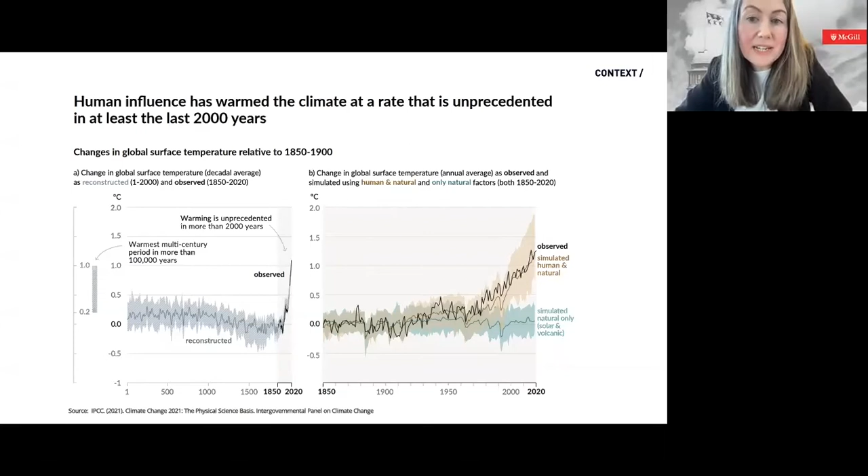The report outlines the pathways limiting global warming to 1.5 Celsius require rapid and far-reaching transitions in, among other factors, energy and urban infrastructure, which includes buildings. So this forecast makes considering the reduction of greenhouse gas emissions in the design of our built environment ever more pressing. And why are buildings an issue?

Well, on a global scale, buildings use 40% of resources, 25% of water, 40% of energy, and they contribute to approximately one third of global greenhouse gas emissions.

So this is where considering a circular economy in the built environment can be very promising, unlike a linear economy, which is more typical in the construction industry today, and results in high consumption of energy, water, raw materials, and also high pollution in terms of emissions, wastewater, and construction and demolition waste.

A circular economy strives to improve resource efficiency mainly by closing the resource loop and by stopping the wasteful use of resources. And as climate pressures increase and material scarcity is imminent, systems thinking and innovation in material recovery will be critical to really helping ensure that built environments can embrace this kind of circular approach.

This is something that we explored through a report on circular economy in the built environment. This report was part of a series of regional reports prepared by the United Nations One Planet Network Sustainable Buildings and Construction Program. It looked at the state of play for circular built environment from regions around the world, with other reports looking at Africa, Asia, Europe, Latin America and the Caribbean, as well as Oceania.

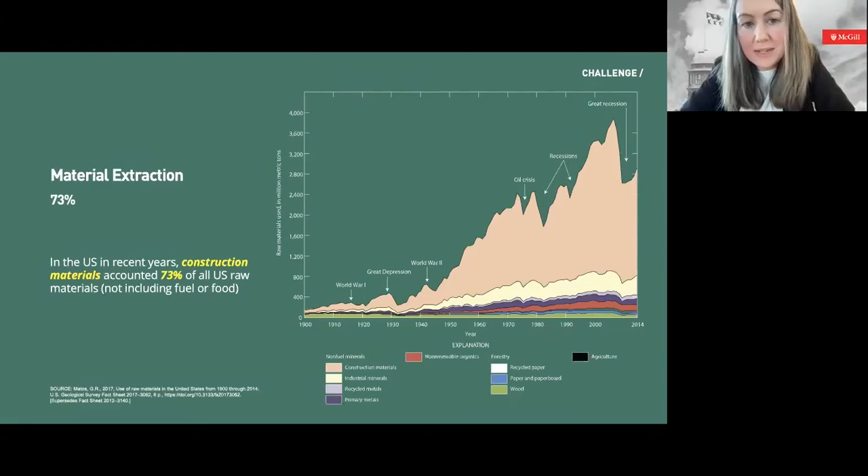And if we think about the end of life of materials, when it comes to municipal waste, in 2017 figures in the US, 52% of municipal waste went to landfill, and 25 to 45% of all construction solid waste stream was construction and demolition waste.

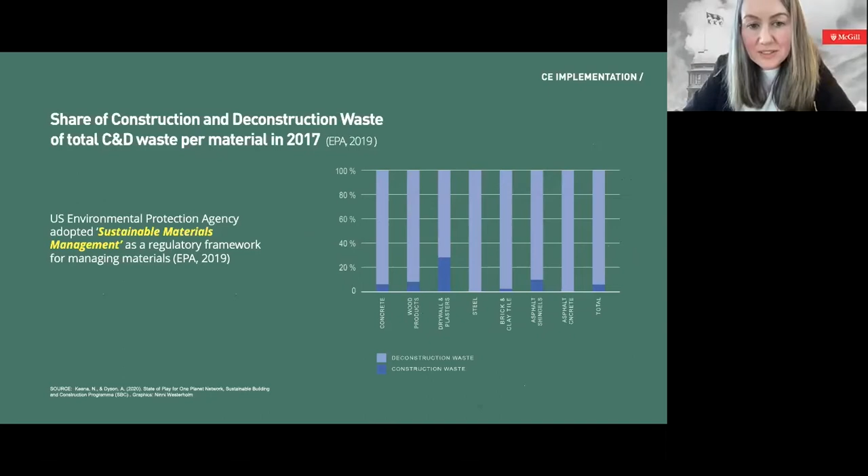Construction and demolition waste is at the deconstruction and demolition phase, but we also see it at the actual construction phase. Another key challenge was a lack of innovation or change within the construction sector. According to a US Department of Energy report, the compartmentalization and the lack of communication between building professionals in each sector results in suboptimal designs and less than optimal building operations, while contributing to environmental impacts.

A McKinsey report on the construction sector highlights its lack of productivity, predicting that faced with sustainability demands, the sector will need to reassess how it builds to reduce waste and abate carbon emissions. A report mapping productivity to digitalization shows that construction has digitalized less than other industries, even less than agriculture, forestry, fishing, and hunting.

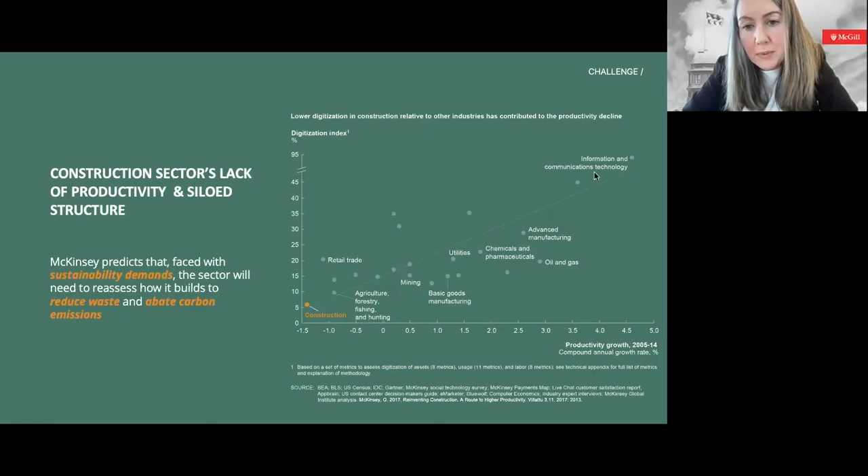One point to note is where advanced manufacturing is placed. Circular implementation is evident in other industries such as advanced manufacturing, and one reason for this, particularly in the US, is that federal legislation allowed for and supported circular economy implementation and circular manufacturing.

In particular, the Revitalize American Manufacturing and Innovation Act, or the RAMI Act, which came about during the Obama administration, was a legislative basis for innovation within US manufacturing. It promoted circular manufacturing and implementation, helping bridge a gap between academic research and established industry partners.

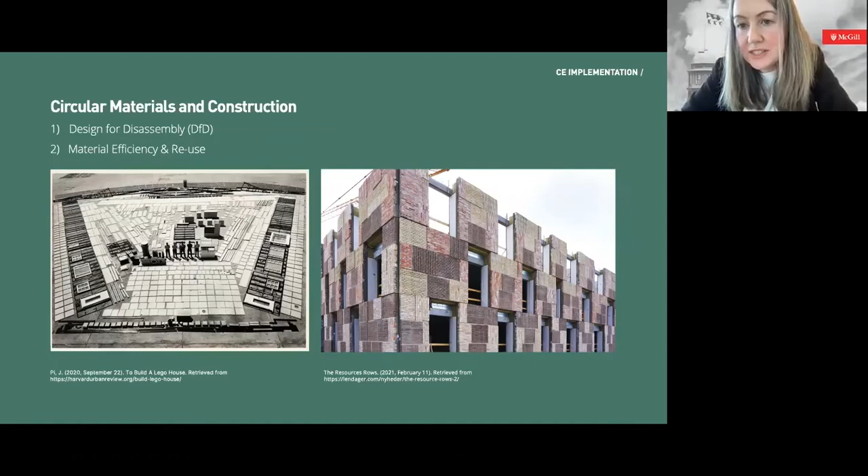In terms of circular economy principles in buildings, this concept can lead to principles such as design for disassembly practices or material efficiency and reuse.

The report outlines steps towards transitioning to a circular economy. I won't go into all of this today, but one step is the design of multi-beneficial policies that take a whole building life cycle and a systems thinking approach, because such policies could allow for multi-stakeholder engagement and cross-industry collaboration.

This is key because currently the built environment process, from extraction to end of life, is siloed. Cross-industry collaboration is essential in facilitating circular strategies, which could potentially lead to amendments in policy and building codes.

One key takeaway from the research was that technology and big data have a role to play because they can help create these cross-industry collaborative networks.

The first project I'll show is a data to knowledge framework that aims to use data to allow for cross-industry collaboration and facilitate circular economy in the built environment, so that we can move from a linear material throughput economy approach to a more feedback-reinforcing design approach.

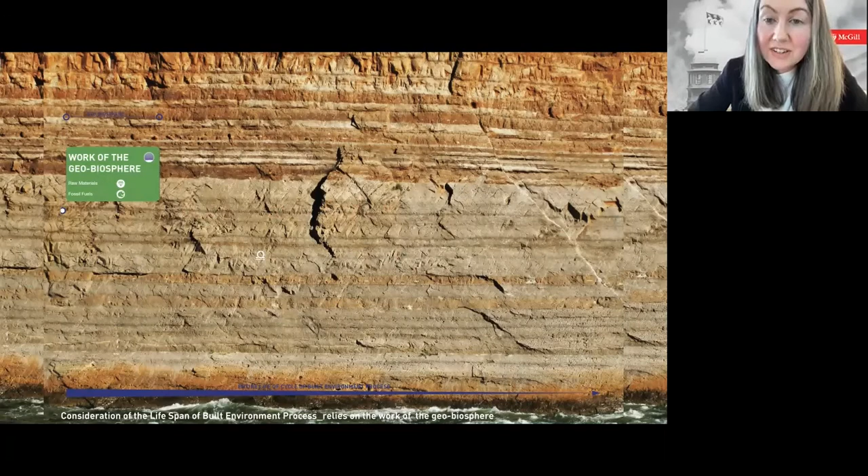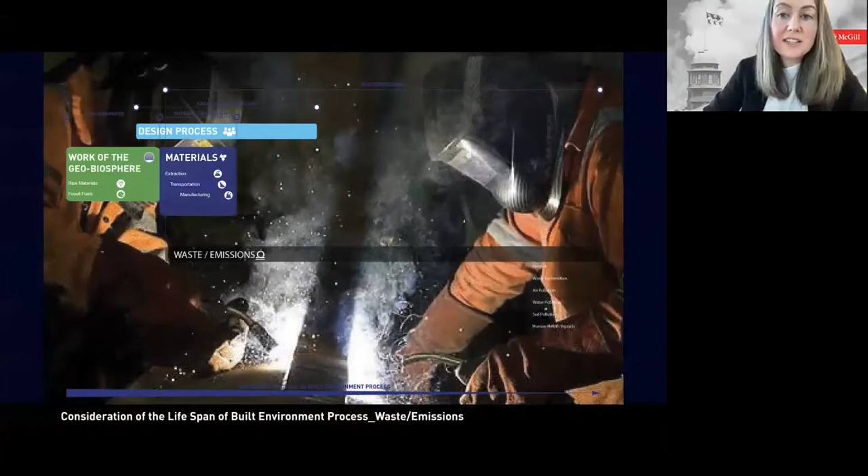It starts with the work of the geobiosphere, which can occur over millennia to produce many raw materials, currently not included in many life cycle accounting methodologies. By including this important information on ecosystem goods and services and biogeophysical processes that we consider in material extraction, transportation, and manufacturing, we can understand the cost to the geobiosphere at each stage in the built environment process.

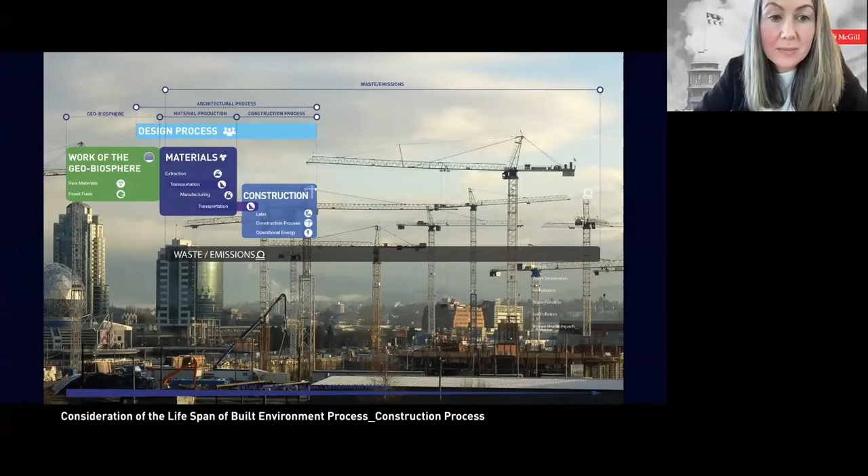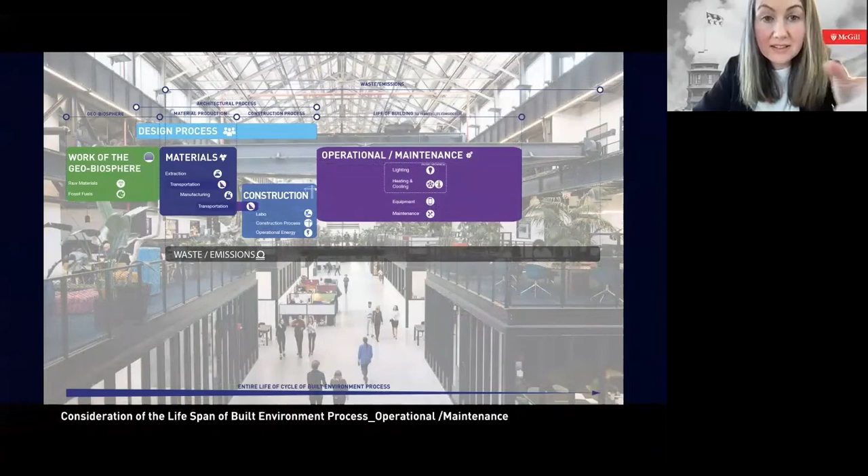This could be revolutionary to thoroughly understand the environmental impact of the built environment process, akin to carbon accounting today. By tracking carbon, energy, and material flows throughout the built environment process, and not just in the operational phase, we can start to understand the impact from the initial construction to the future dismantling, and think of it as a system.

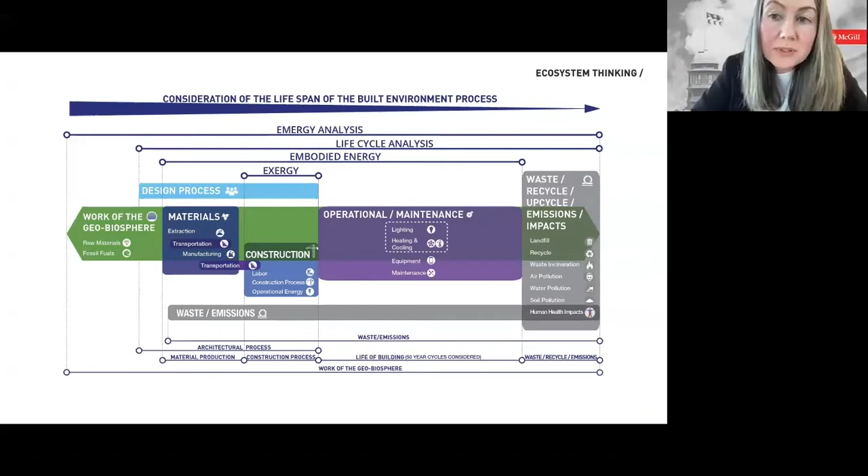A whole building life cycle systems approach. This is the expanded scope in both time and scale, which we aimed to virtually map.

The second research objective involved exploring how we can harness big data in mapping interconnections within the built environment process. Here we see the classic relationship of decision-making within the building sector, and this is much easier when we have small teams.

But this research is towards an ecosystem intelligence and towards distributed knowledge across life cycle phases. This is particularly relevant to overcome the challenge of large projects with numerous different teams and complex information flows.

So we question, how can we provide inclusive environments that link data, design, and knowledge, such as parametric environments that can constantly be reconfigured according to new information.

Through this research, we introduced this data to knowledge framework named SEVA, as opposed to frameworks that have come before that are limited and disconnected, leading to siloed outputs at each phase of the built environment process.

SEVA is novel in that it explicitly sets out to provide a framework that visualizes and connects the resulting outputs from each life cycle phase, offering this ecosystem intelligence to the built environment process.

Data to knowledge and the way we share data is much more developed today than it was 20 to 30 years ago. Today, data to knowledge frameworks offer unprecedented opportunities in decoding complexity.

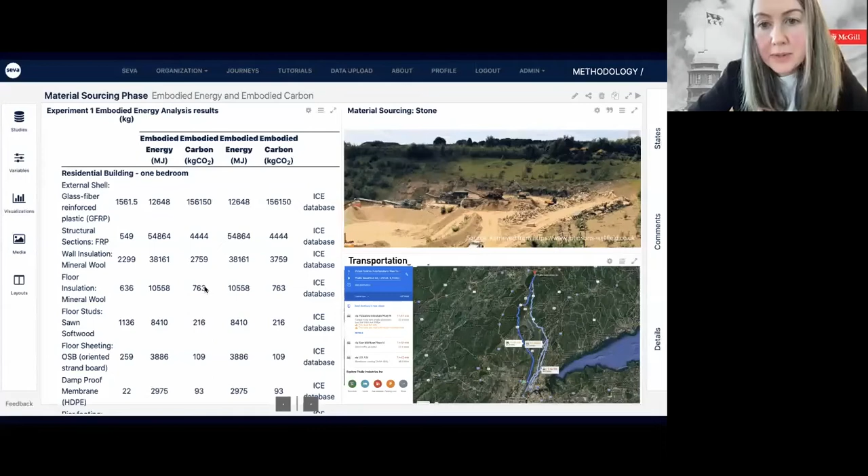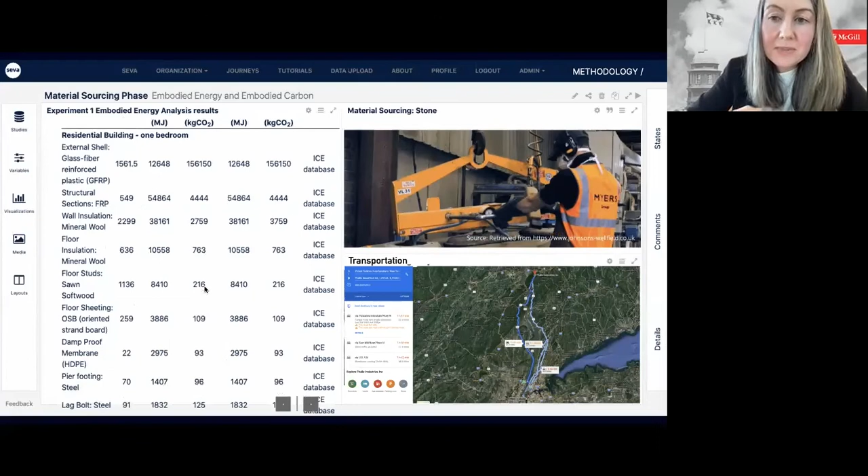At the material phase, we can incorporate embodied energy and carbon of different materials. We can explain material extraction and manufacturing processes. And since transportation has a major impact on material life cycle values, understanding the distance from source to construction site is important information to combine.

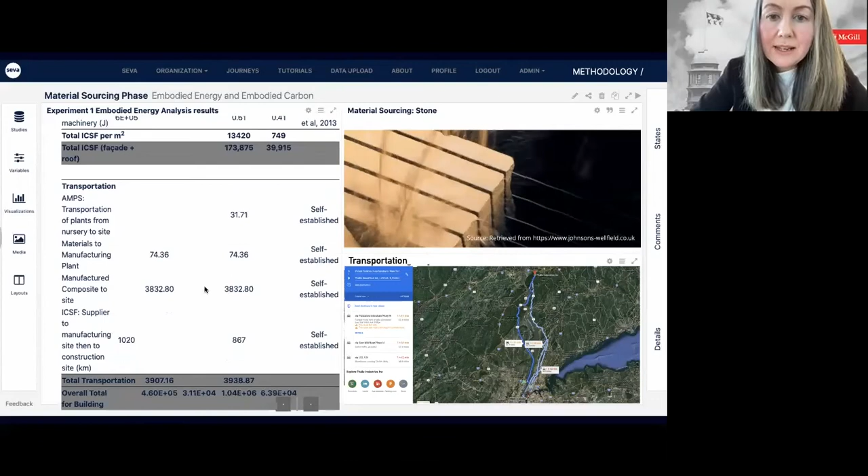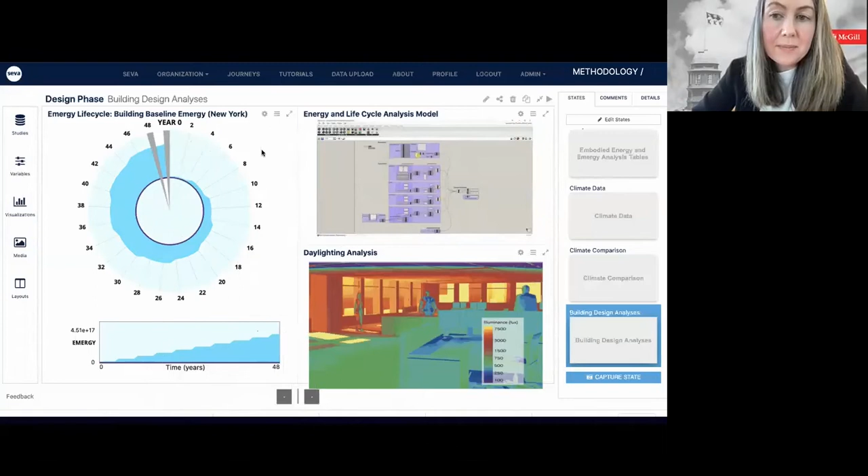And at the design phase, multiple analyses can be viewed, from life cycle of the building design to integrated 3D models and energy and climate analysis, to the resulting visualization such as daylight analysis, as well as different design options and their life cycle impacts can be understood.

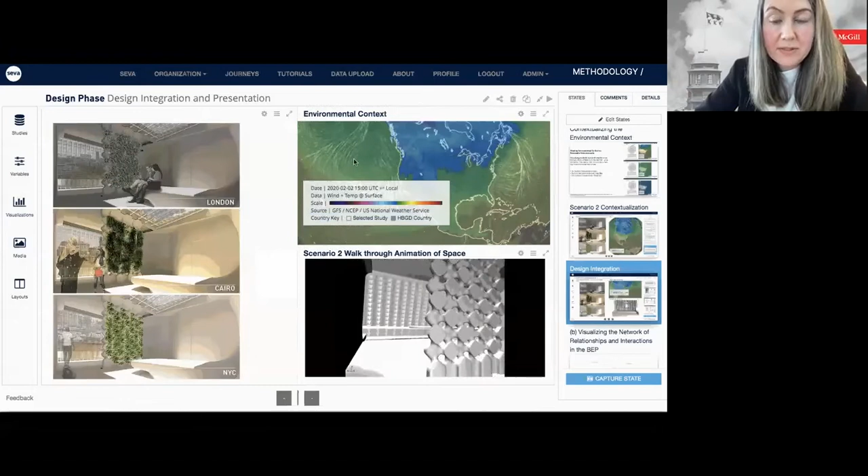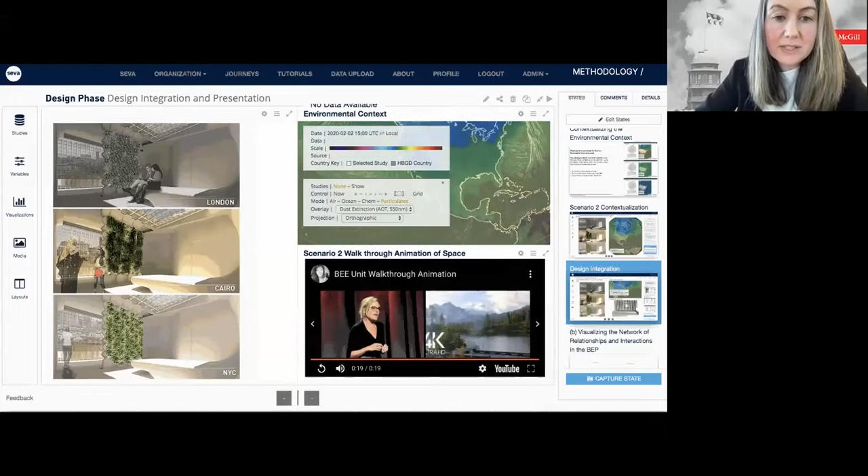And integrating multiple aspects of the design, from renders and drawings to walkthroughs to live climatic data, which can help contextualize the building with changing climate over time. So we're including historic climate data, but also looking at live climatic data to really be able to understand changes to the climate and how that's affecting the building.

And then during the construction and management phase, really using the framework to act as an organizational tool. Showing how different teams, such as subcontractors, for example, as well as budget and resources and personnel and big data, and how data is being used, can all be organized and seen through the tool.

And then during the operational phase, this may involve mapping data from Internet of Things and sensors, such as air quality data, and understanding the internal environment, as well as energy aspects.

If there's any on-site renewable energy, being able to understand the energy generation on site, but also being able to understand the energy consumption. And this can allow for new ways of managing buildings and can also allow for occupancy comfort through the use of such data and by allowing occupants to have access to this live data feed.

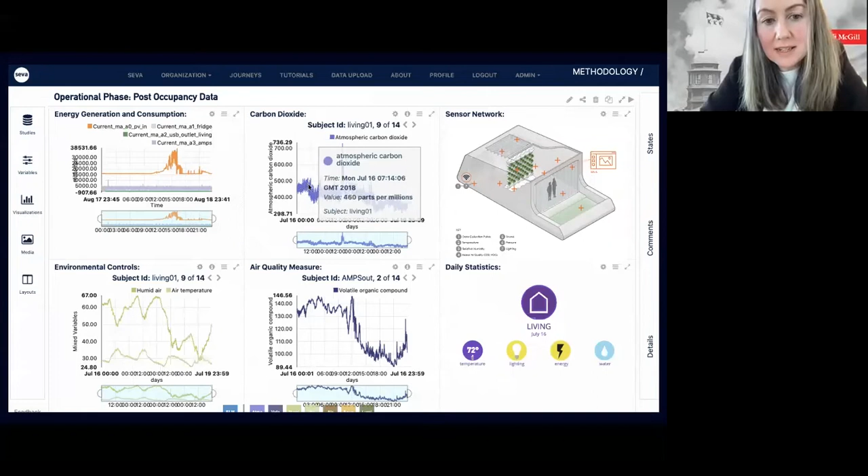And then at the end of life phase, this becomes very interesting and can potentially really enable a circular approach, in that you can use the data from the material, design and construction phases, such as understanding material composition of a material.

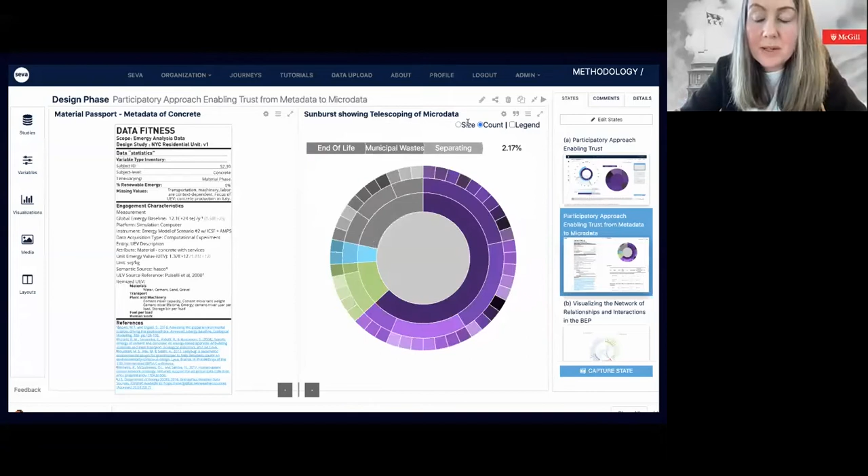For instance, here we see a data fitness ticket or material passport explaining the concrete used in the building on the left. And this helps inform decisions about material reuse or remanufacturing, as well as information about the construction assembly, which can be then used to help inform design for disassembly procedures or practices.

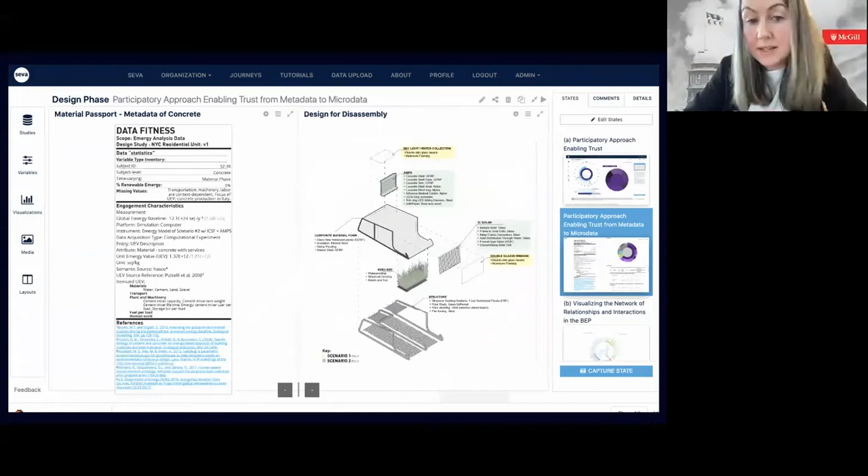So for this work, we hope that it can enable a built environment process which operates more as an ecosystem. And in collecting data on building projects from mapped built environment process life cycles, we can conceivably imagine a database of projects that can be searched by location, building typology, perhaps key performance metric.

The research has significance in multi-stakeholder engagement and evidence-based decision-making, especially within work which strives to find solutions to grand challenges such as environmental issues.

By unlocking the potential of big data, we aim to facilitate the ability to project future scenarios towards more sustainable and progressive solutions. It offers potential value to circular economy methods, amendments to building and policy codes, and the creation of incentives for cross-industry collaboration.

The second project I want to talk about today is the Ecological Living Module, which was a collaboration between CEA, UN Environment, UN Habitat, and Gray Organschi Architects.

This project speaks to the regenerative principle of circular economy, which involves designing a building that goes beyond doing less harm, but actually can help the environment through its design. It uses regenerative design principles to consider the whole building ecosystem, aiming to create a resilient building that integrates the needs of society with the integrity of nature.

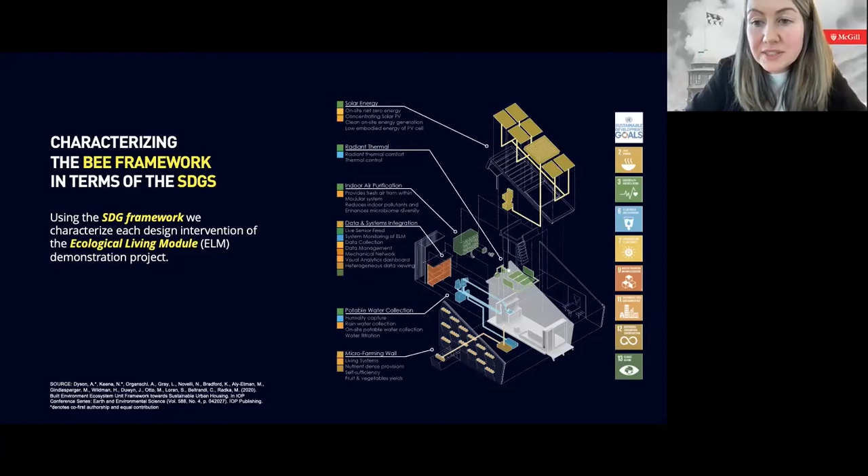This is interesting because the housing sector directly impacts the majority of the UN SDGs. However, striving to achieve these goals in a compartmentalized or siloed manner has impeded the implementation of transformational solutions that increase the security and well-being of urban populations.

So the design of the ELM built on prior research, and a number of different demonstration projects that really investigated and developed novel systems for a range of factors, from indoor air quality to water capture to renewable energy and circular material life cycles, and to considering how we acquire data towards socio-ecological design.

This also built on prior testing of the framework in other demonstration projects. These are just some examples of the different prior research that we built upon.

As a background, the house was demonstrated on the UN Plaza in New York as part of a UN high-level political forum in 2018.

UN Environment invited our center, the Yale Center for Ecosystems and Architecture, to design a microhouse to highlight the central role of sustainable buildings and how they address the UN SDGs, and also to address the need for quick deployable housing and infrastructure in the face of climate change migration.

So the toolkit, or the framework, was to allow for this sustainable on-site self-sufficiency. It's important to point out that we weren't suggesting that this home would be replicated, that there would be a mass production of the demonstration project around the world.

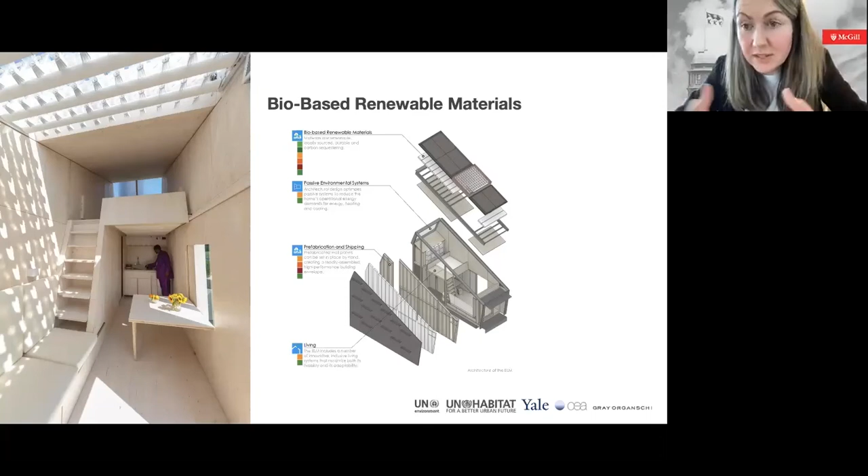So the module is constructed from locally harvested renewable materials. Cross-laminated timber was used here, which is a plentiful resource in North America, where this was being shown and designed for. In other climates, other material strategies could be employed.

Bio-based materials allow for a circular economy. They can offer low carbon alternative construction materials by using low amounts of energy and carbon in their initial production, and by storing and sequestering carbon during the life of the building.

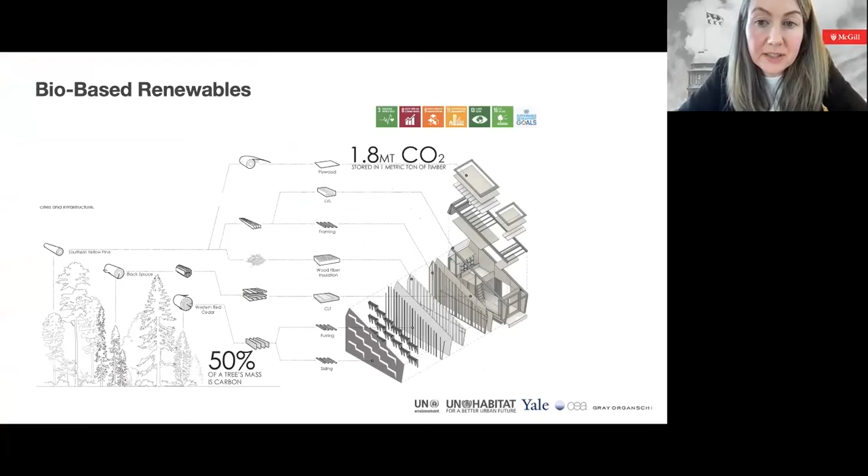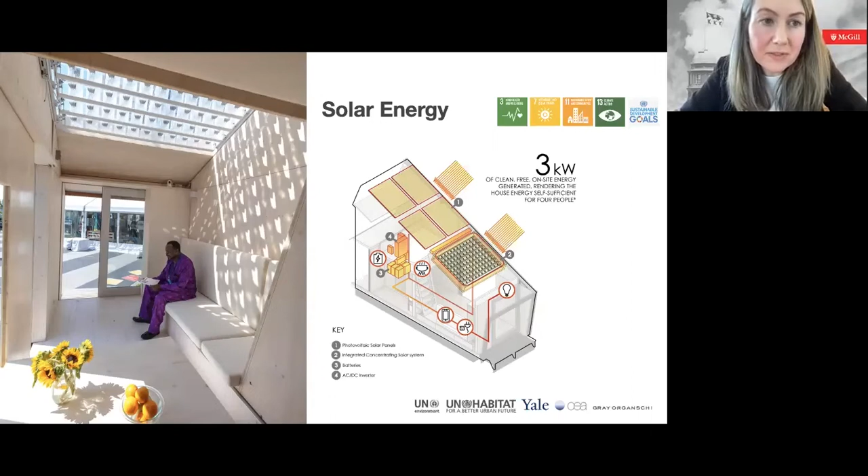This is by HeliOptix, and the design of it was developed for many years by members from the CEA team. The water management strategies included rainwater collection, grey water recycling, filtration, and water generation, where humidity is extracted from the air to be used as potable or drinking water.

This system is linked to indoor air supply so that excess humidity indoors can be reduced and made more useful. This was showcased in New York in the summer, so it was quite humid, and it produced a lot of potable water, which was really interesting.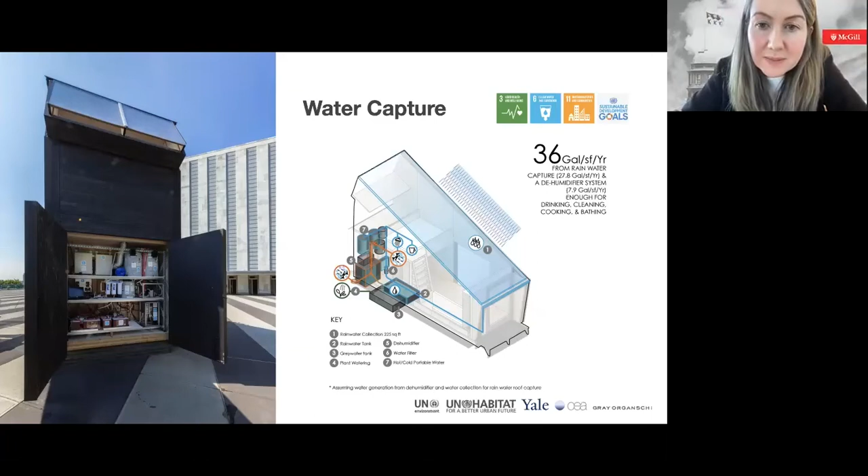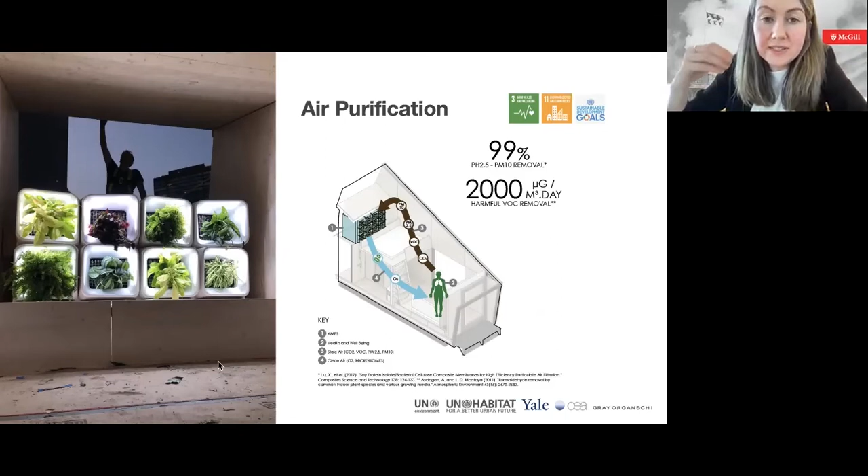In the loft space, there's an air purification system, an active phytoremediation system, which you see here. This allows for indoor air to be continuously cleaned, offering healthy indoor space within the interior, even if the outdoor air supply is polluted.

In New York City's climate type, we calculated that this microfarming wall would provide daily fruit and vegetable nutrients needed for a family of 4 for 260 days a year. In other climates, this could be even more.

The design was made to accommodate a family of 4. There was the loft space you're seeing up here, which had a bedroom, and then there were beds that could easily be converted into a bed or a sofa space. So the design itself followed a modular approach.

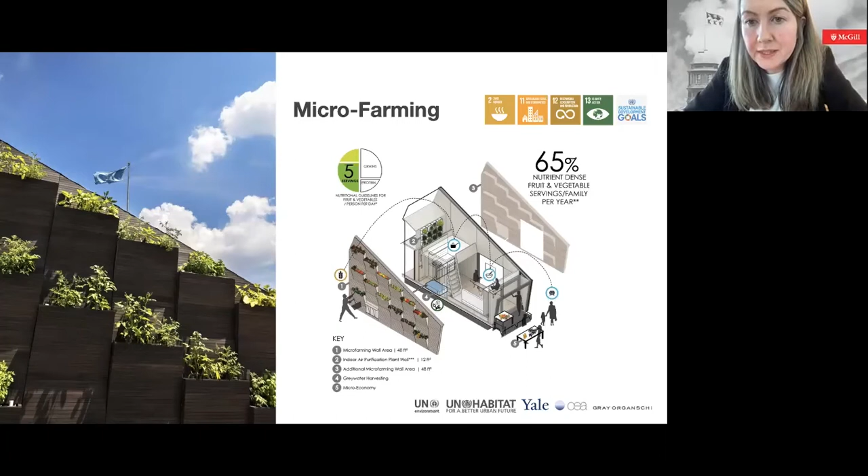Here we see Amina Mohammed, the Deputy Secretary General, harvesting pepper from the wall. The wall actually also enhanced biodiversity, with local honeybees finding their way to these flowering plants over the summer.

This is the team on the plaza. We actually erected the whole building in 3 days. All of the building systems are modular design, so they were easily transported and erected on the project during that 3-day time frame. The actual building itself was designed and fabricated offsite and then brought here, and through modular design and construction was easily put in place.

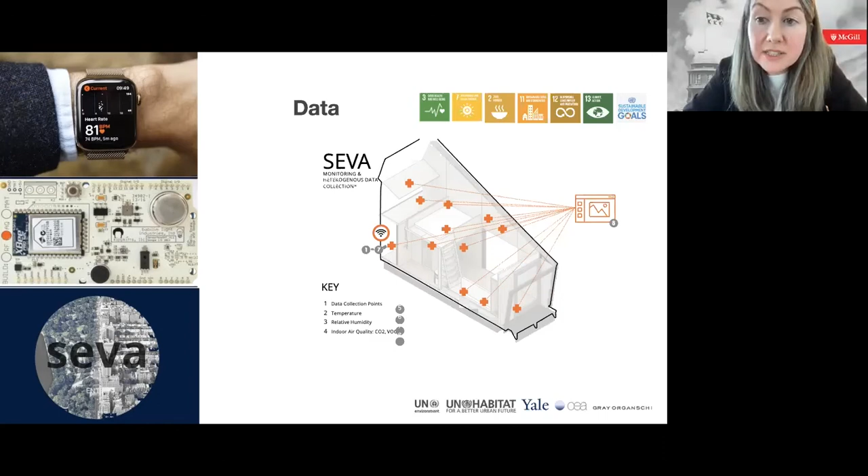We included the SEVA framework I just talked about as part of this project, because we really wanted to monitor both the interior and exterior environmental conditions of the site, as well as the functioning of the different systems. So what you're seeing here is where we placed sensors around the building, and this is what I've shown before. Through SEVA, we actually visualized the data, and were able to show it on site.

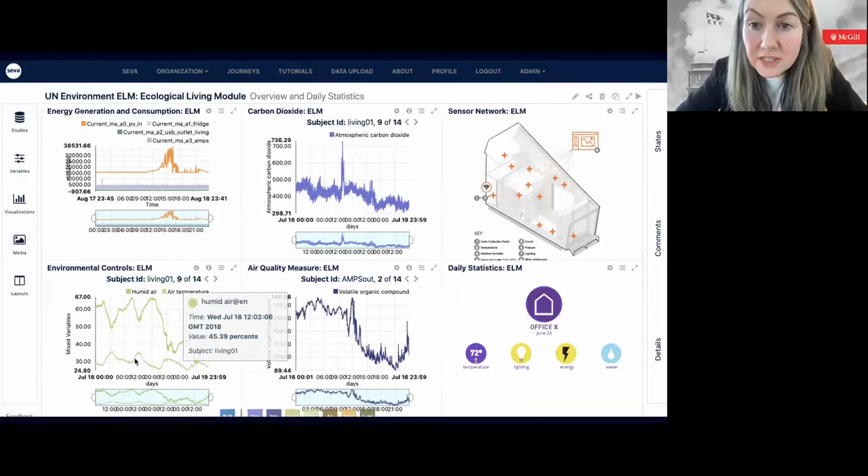We had a screen as part of the house to show in real time the air quality, the solar electricity consumption and generation, as well as the temperature and the humidity.

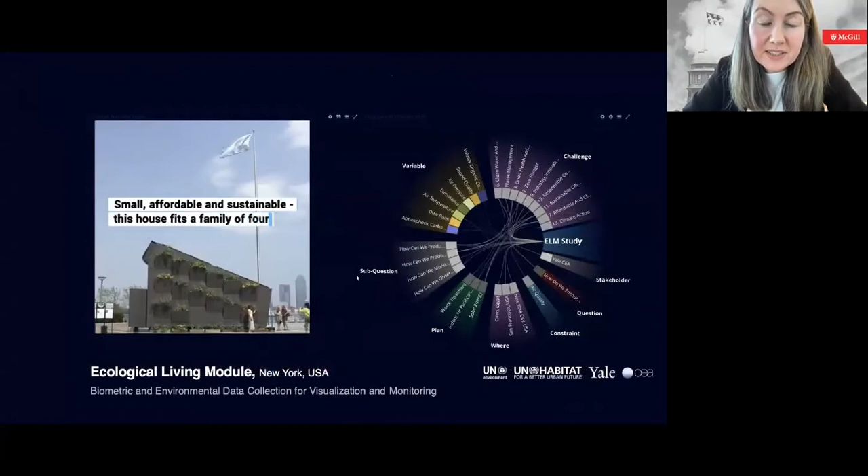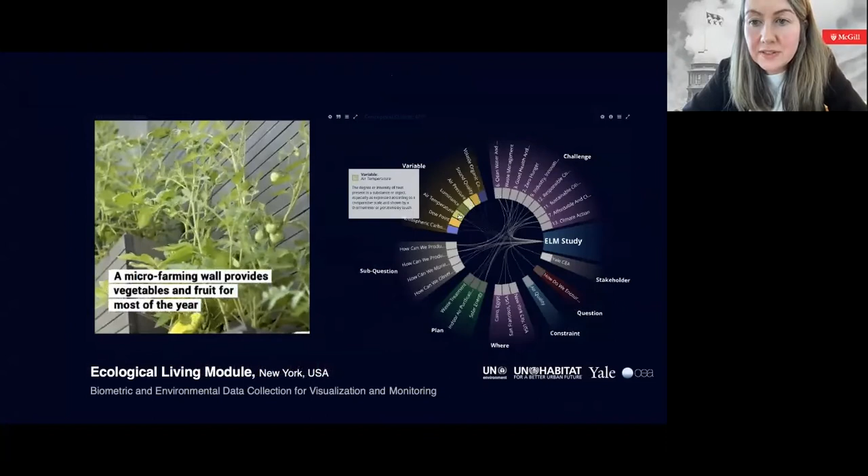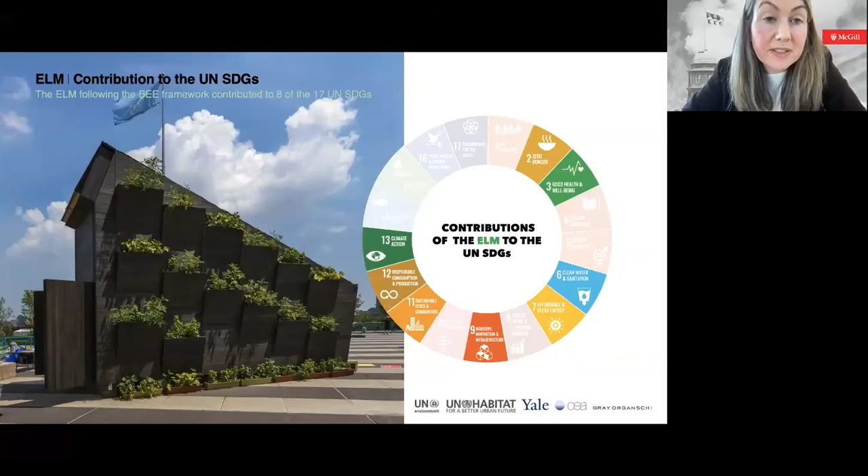This highlights that the ELM following the BEE framework contributed to 8 of the 17 UN SDGs. So we outline how this built environment ecosystem framework can enable the association of SDGs as an integrated package, with the ELM performing as this scalable but self-reliant ecosystem of systems that can enable systemic change.

Future research is towards scaling up in density of such housing systems across multiple climatic and cultural contexts, to really allow for ubiquitous sustainable urban housing. But again, as I said, to use this regenerative design approach and apply it to local contexts.

So that was one of the key things there.

I'll finish with briefly talking about a current project on circular economy and housing. This project, in its early stages, is called Data Homebase, a prototype visualizing Canada's housing characteristics to foster a circular economy. It's part of an interdisciplinary effort led by myself, Professor Avi Friedman, and Professor Michael Jemtrud at the School of Architecture.

It's part of a CMHC challenge addressing Canada's housing supply. The challenge was: how can we create data solutions that improve decision-making for housing supply across Canada? Uppermost on our mind were two key challenges affecting Canada's housing supply: affordability and sustainability.

As well as the case studies, we're also creating two innovative demonstration projects, or archetypes, of typical housing typologies, with initially a focus on Montreal. These are the multifamily and single family circular housing.

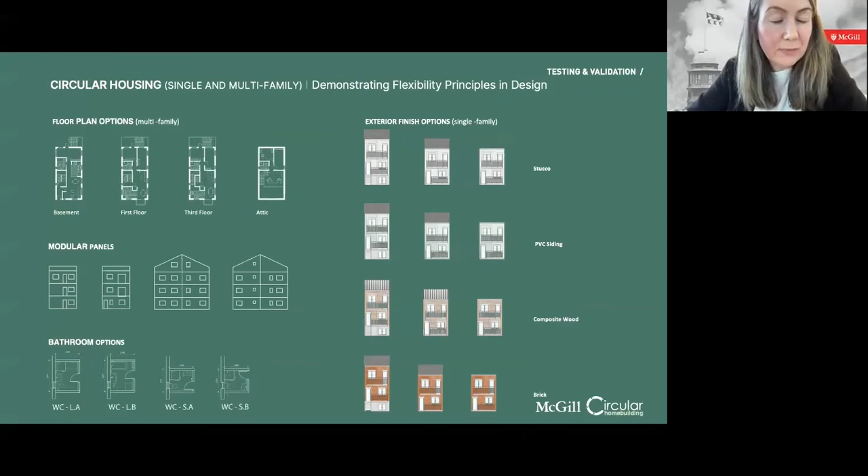We've integrated modular and flexibility principles in their design, such as modular construction and flexibility of bathroom and kitchen options, for instance. These archetypes are then integrated into the toolkit feature of the Data Homebase application.

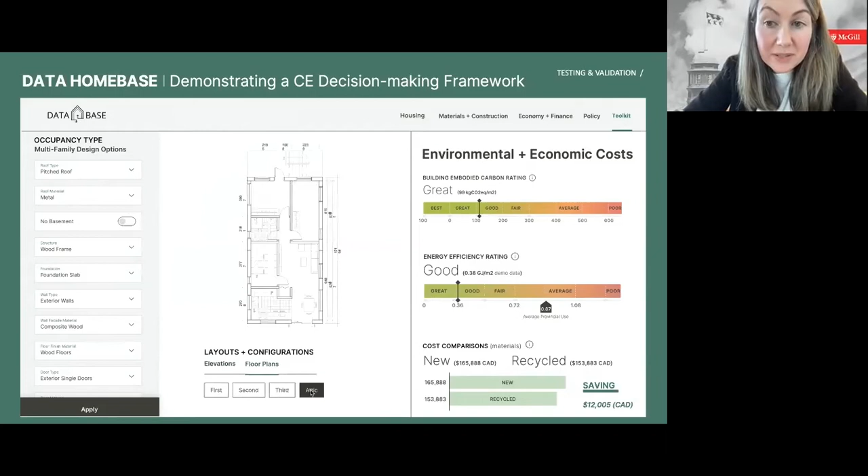Using this easily accessible data visualization, a user can make changes to the geometry, materials, and components of the demonstration archetype. In real time, they see how their choices affect the building's appearance and occupancy type in terms of layout configuration, as well as the environmental and economic costs associated with that decision, in terms of embodied carbon, energy efficiency ratings, and cost for new versus recycled materials.

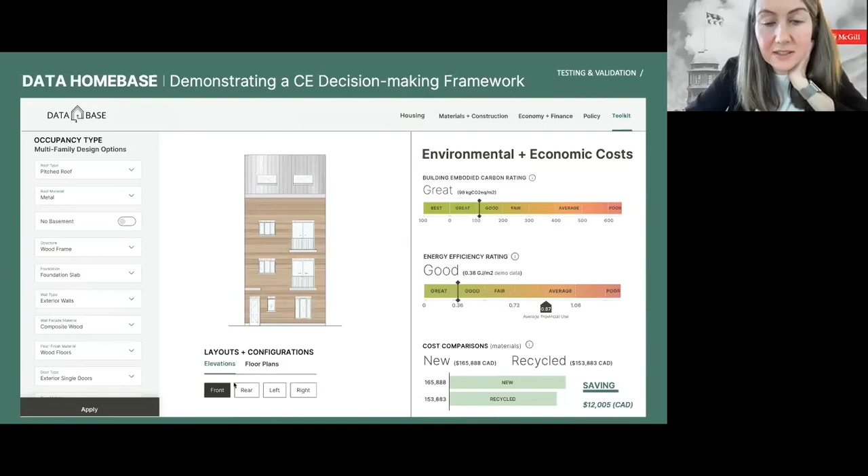These results, which you see as a kind of benchmarking here, are based on extensive analyses where we use life cycle analyses to look at the embodied carbon rating, and life cycle cost analysis to look at the cost comparisons.

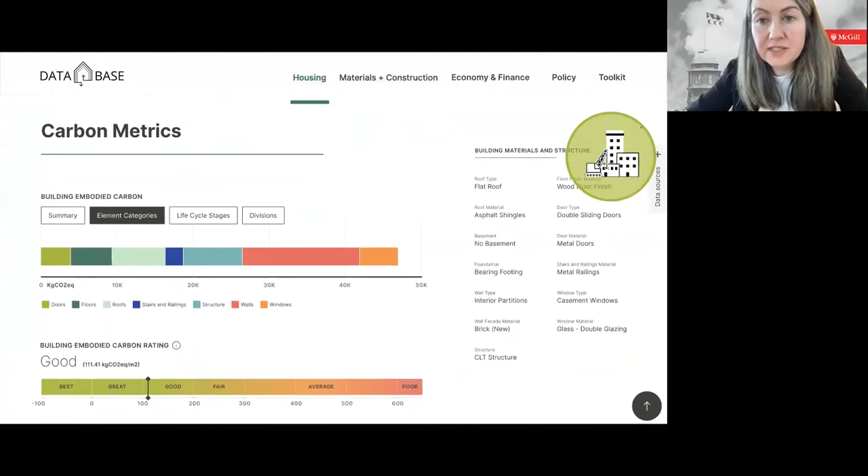We believe that the data accessed through the web application can be very useful to different user groups, whether it's home building sector actors wanting to understand environmental benchmarking of housing in terms of operational energy and carbon emissions, financial stakeholders requiring data to complete affordability and green financing property assessment, or policymakers needing data for evidence-based policy generation, to show contributions to the UN SDG targets and indicators, or to understand the socioeconomic context and demographics of an area in terms of housing affordability.

So we're confident that Data Home Base can be valuable to these three key stakeholder groups because we've taken a pragmatic approach to its design, and many of its features are influenced by conversations we've had with a variety of housing stakeholders during the proof of concept design process. This engagement with relevant parties has allowed for this new feature, because one of the things we learned from our conversations was that a circular economy approach to housing supply relies on communication across stakeholders in the housing value chain.